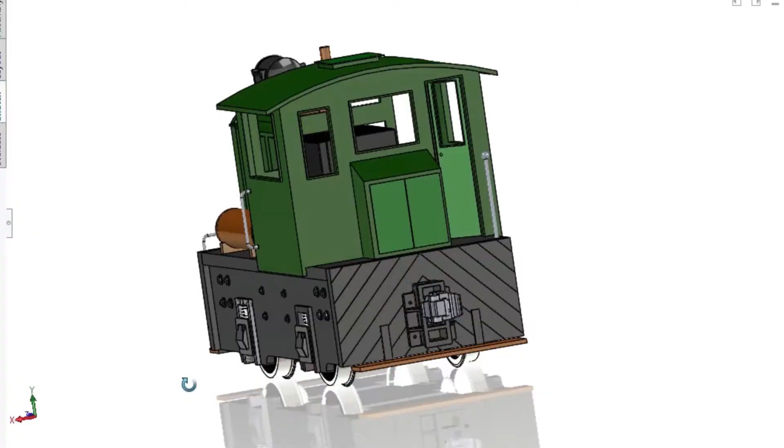I've been working on this little project. It's an electric locomotive for my backyard railroad. The railroad has 7.5-inch gauge track. This runs on 2 electric moped motors and a couple of moped batteries. Here's the CAD of what it'll look like when it's finally done.

And I needed to bend up some grab irons for the locomotive cab sides. So I looked around for commercial rod benders. I didn't really like anything I saw, so I decided to build my own. So this video is the process of CNCing the various parts.

And the video turned out way longer than I originally planned. So if you just want to see the rod bender bending some rod, skip to the end of the video. But if you want to see how the parts are CNC'd and turned on the lathe and how the tool paths are set up, stick around.

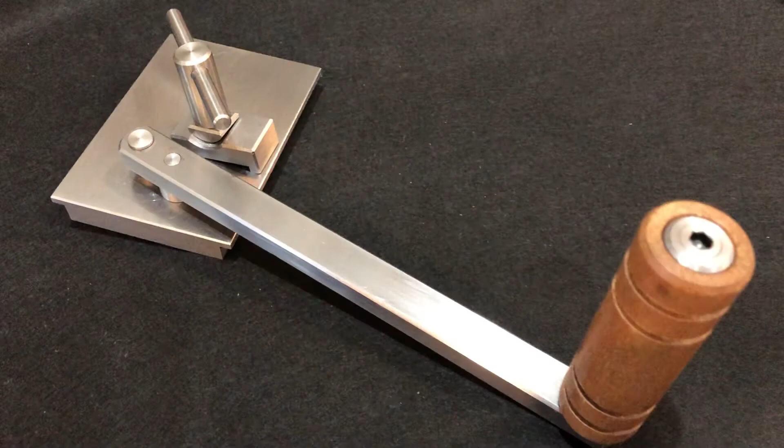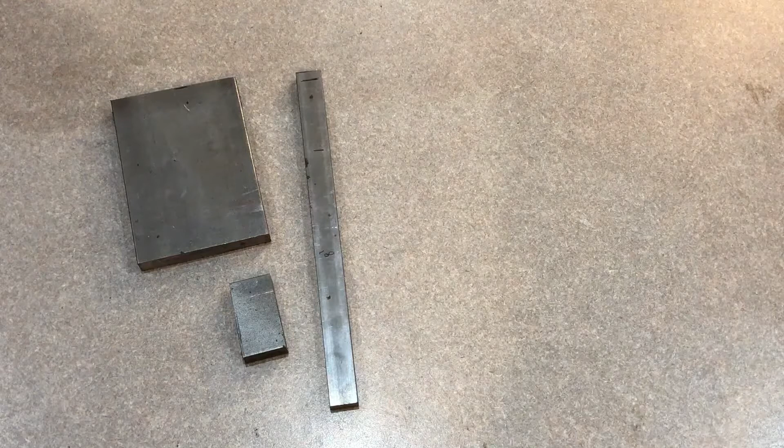So here are the materials. A 1/2 inch by 3 inch mild steel piece for the base, a scrap of mild steel for the clamp block, a piece of 1/2 inch by 5/8 inch mild steel for the bending arm, and some stainless rod from my scrap box, probably 303, and some 1-inch wood dowel.

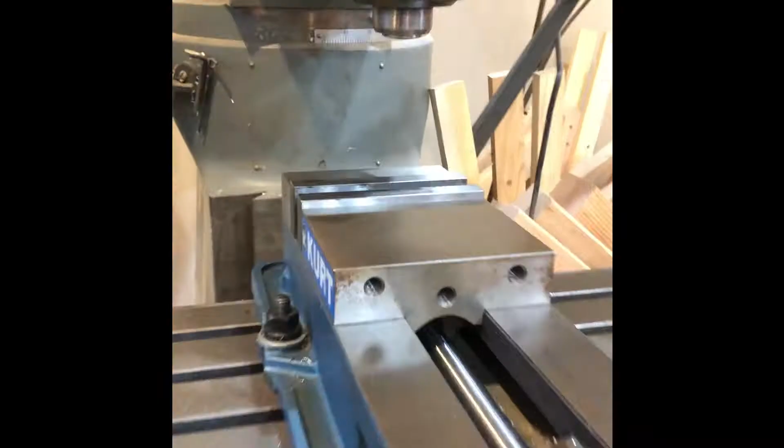To machine the parts, a Tormach PCNC 1100 for doing the CNCing, an old Series 1 Bridgeport, and the Grizzly 14x40 gearhead engine lathe. For doing the milling, I had a nice brand new 4-flute high-speed steel 1/2 inch end mill, but as it turned out, it was about a 1/4 thou too large to fit in the holder. Go figure.

Several interesting options for pushing it into the holder instantly came to mind. In the end though, I chose probably the worst idea I had. This is a tortured 1/2 inch carbide end mill I used on some previous learning curves. The only thing it really had going for it was that it actually fit the TTS holder. Okay, moving on. So let's get started.

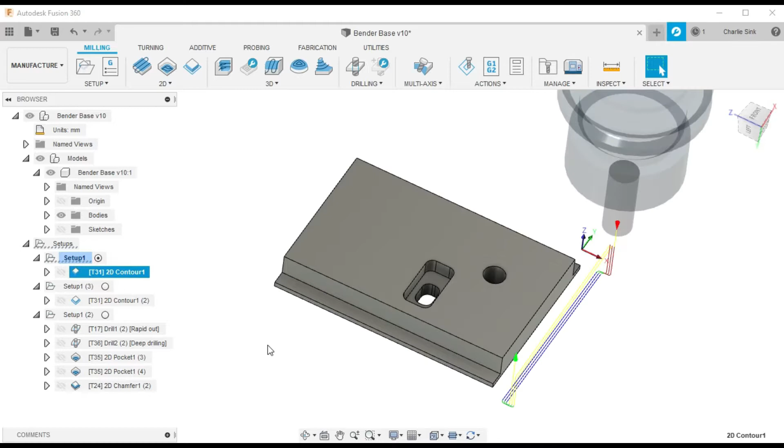First part is the base block. It has notched sides so it can be easily clamped in a bench vise. It also has a hole for the bending pin and a pocket for the clamp bolt and nut. All the tool paths were set up in Fusion 360. First off was just truing up the ends of the block. Light, easy, very conservative cuts. These were set up in Fusion 360 as contour operations.

The second operation was to cut the side notches so the base block could be clamped in a bench vise, which I set up incorrectly. The cut ended up with a 3mm step over at 7mm deep, which I would have caught if I'd run the simulation. Here's the simulation. Way too much for that dull end mill.

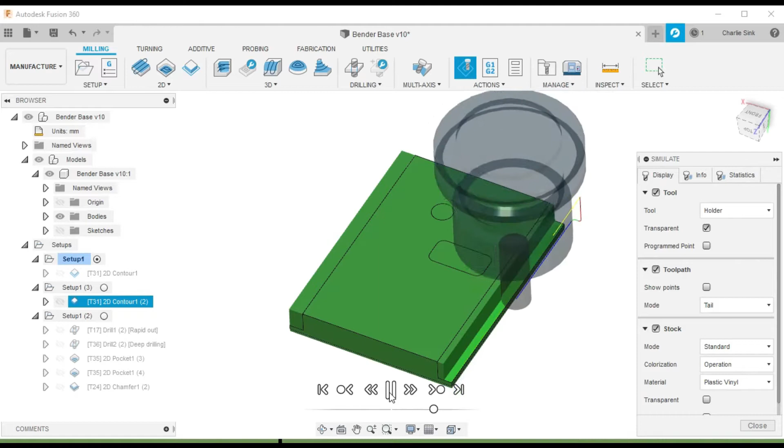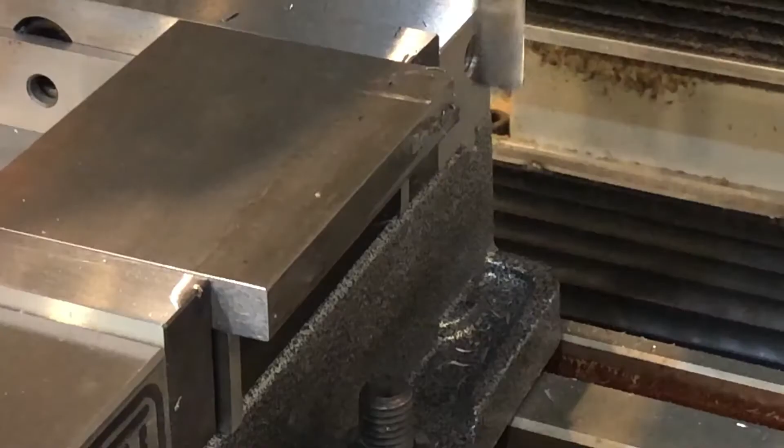And here we go. The camera vibration is coming from the mill through the shop's concrete slab. I could also feel the cutting vibration through my shoes. Not good. I didn't think to get a close-up of the chips, but you can see that they have inconsistent heating, with some that got pretty hot and a lot that didn't. The chips looked like they'd been ripped from the stock. Must have been a dull end mill.

And when the cut finished, I noticed that the TTS holder had about a 1/2 mil of pullout, and the stock had been pulled out of the vise by the same amount. The rest of the cuts on this part were done with 1mm step over. Then I threw the end mill out.

Again. The next step was milling the pocket for the clamp nut and drilling a pilot hole for the bending pin. Holes were drilled in the pocket area to help with chip evacuation. Here's how the setup looks in Fusion. And here's the simulation.

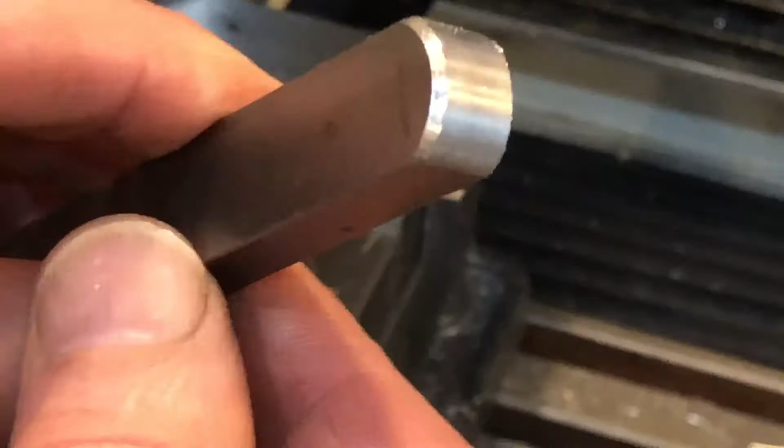This is the chamfer bit I used for chamfering all the parts on the project. It's a 1/4 inch solid carbide 4-flute chamfer bit. Okay, moving on.

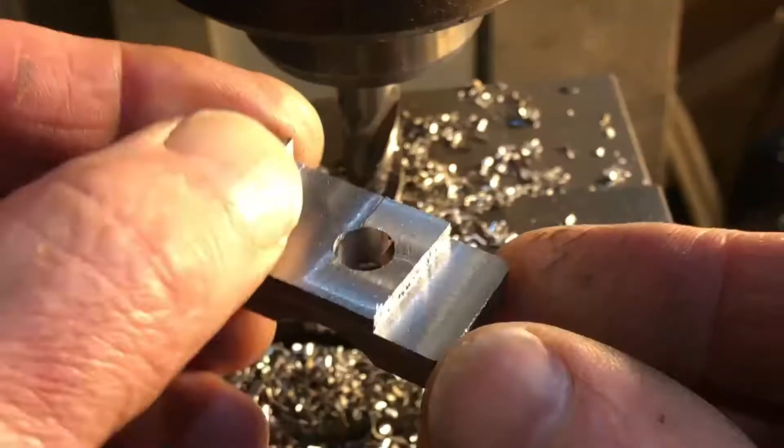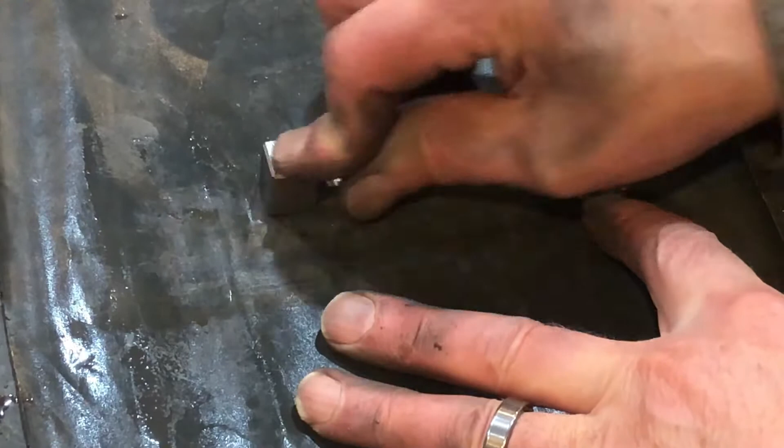To get a nice finish on all the CNC parts, I used 320 grit wet and dry sandpaper. Several minutes of sliding the parts back and forth on the sandpaper that was on the granite surface plate did the job. Keeping the sandpaper wet helped a lot in moving the used sanding grit and steel particles out away from the part.

Next up was the clamp bolt pivot block. It allows the clamp bolt to stay vertical while the clamp block pivots at different angles while using different diameter rod.

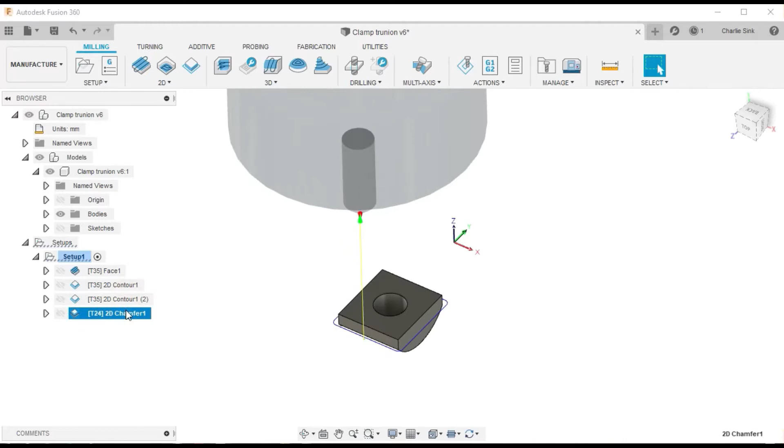Searching through my scrap drawer, I found a nice bit of 3/4 inch diameter mild steel, left over from something. The part was in this thing somewhere. I just needed to remove some metal to reveal the masterpiece that this would soon become, or something.

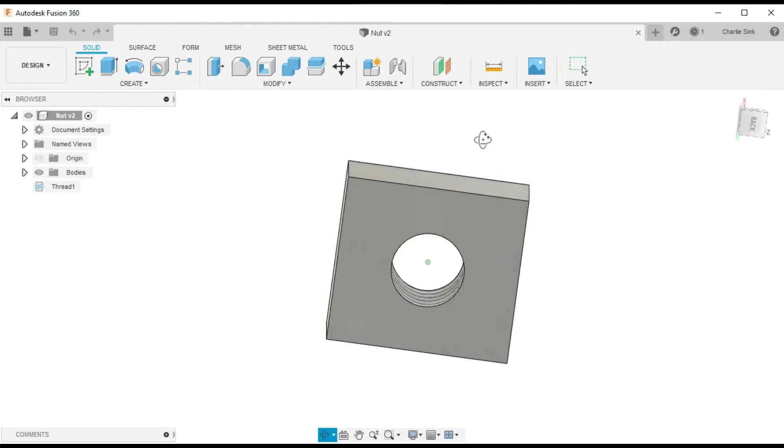Next up was the clamp nut. It was so simple I didn't bother setting up tool paths with Fusion 360. I did all the milling and drilling on the Bridgeport and then tapped at 1/4-20.

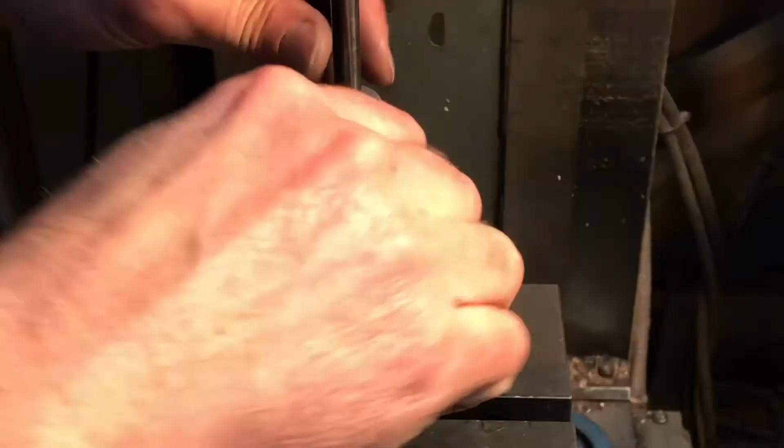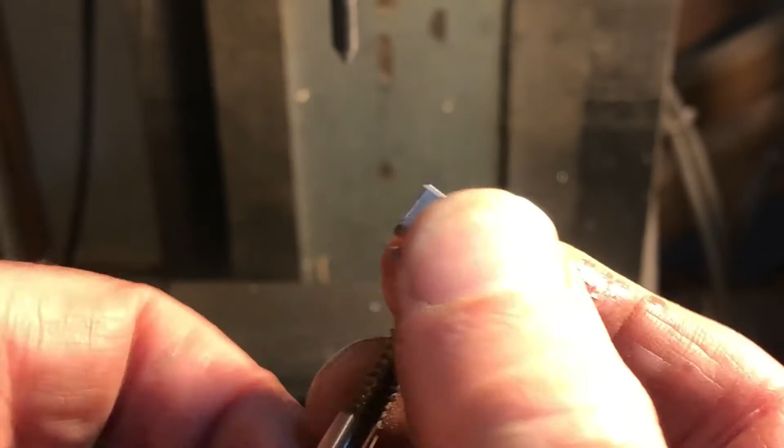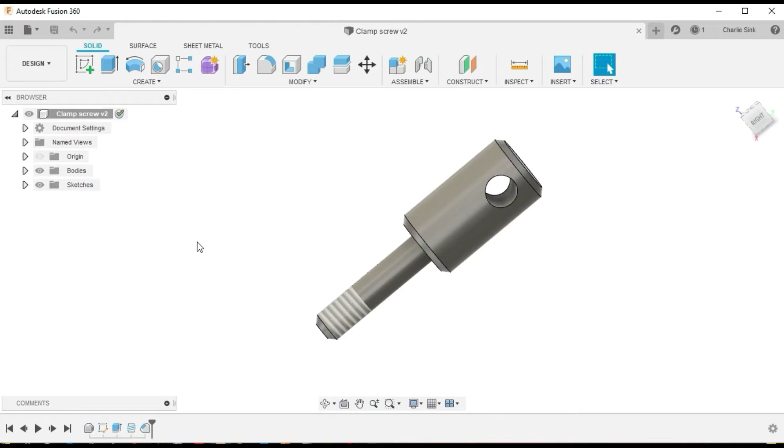Okay, moving on. This is the clamp bolt. It was machined from 1/2-inch stainless rod, probably 303 judging by how well it machined. All operations were done on the lathe, and the hole was drilled manually on the Bridgeport. Thread is 1/4-20. I really need to get one of those tailstock die holders, but until then, the method you'll see in a minute seems to work well enough for now.

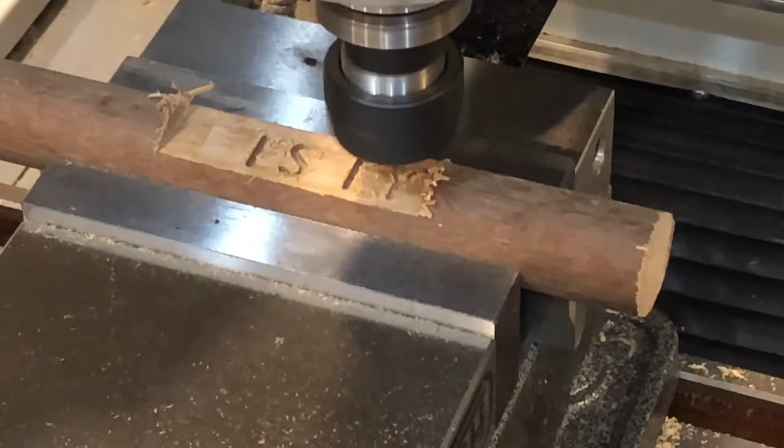The handle retaining bolt, bending pin, handle pin, and roller pin were turned and faced on the lathe.

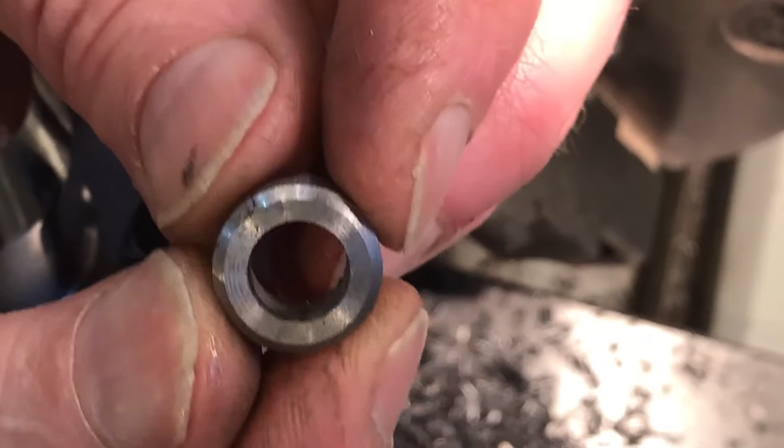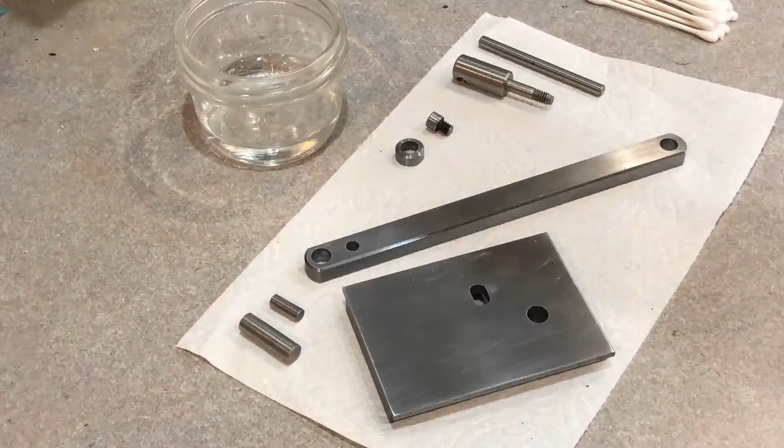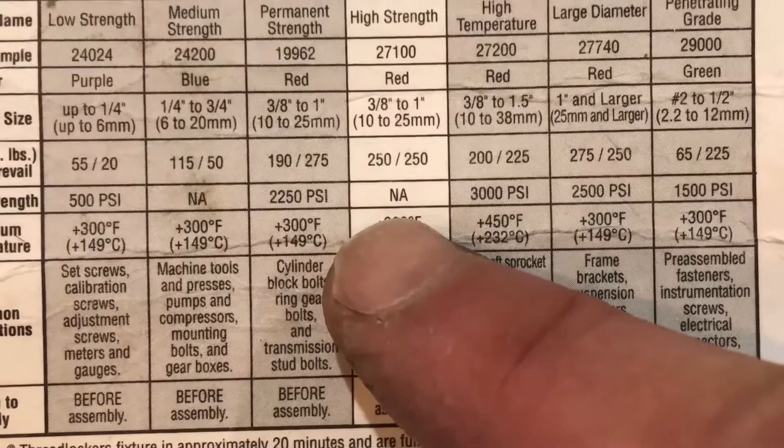If I was a real machinist, you would probably be expecting me to press all these parts together. Since I'm not a machinist, I'll save myself a lot of trouble and just use Threadlock to hold the various bits together. Out of curiosity, I was going to calculate the force needed to push the bending arm pin out of the base block. Consulting the back of the package, I discovered the shear strength for high-strength Permatex is NA. Whiskey Tango Foxtrot? Utilizing logic and deductive reasoning, I concluded that the shear strength must be somewhere between 0 and infinity, based on the available information.

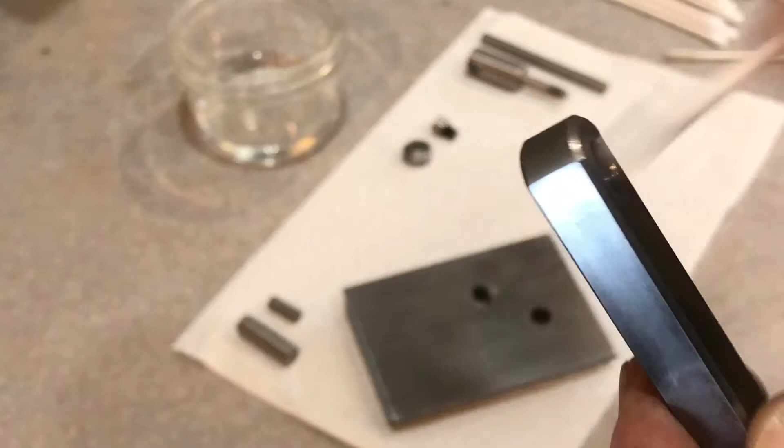Since I don't think the engineers at Permatex can make an infinitely strong Threadlock, and marketing is probably smart enough not to sell Threadlock with 0 strength, I concluded that the strength is probably just really strong. I like building stuff that's really strong, so I'll stick with that. The Threadlock joints are really strong. I also read someplace that not allowing the tip of the bottle to come in contact with the metal prevents clogging. Since I started adhering to that rule, I've never had a bottle clog.